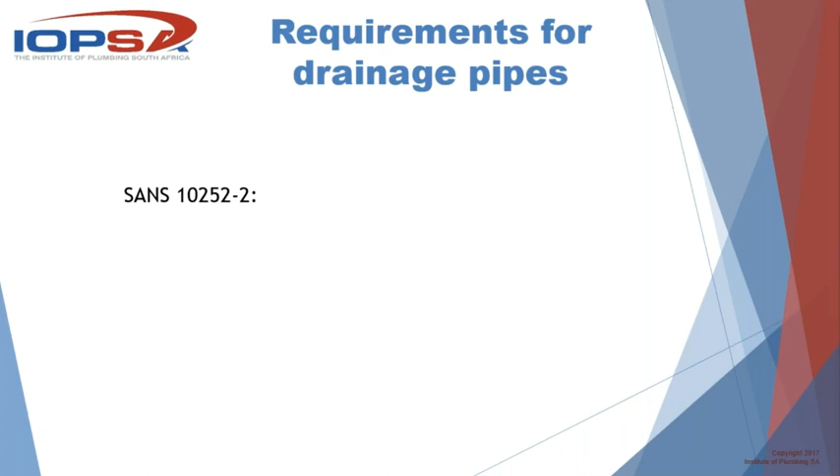because if you look at the standards, they are actually quite demanding. They want you to use plenty of brackets at very short intervals and so on. And what we tend to do is get in a rushed state, and we overlook what the requirements are. So it's vitally important that we understand what the standards say. And they say a few things about bracketing.

I'm going to start with drainage pipes, and then we're going to move on to water pipes, because drainage pipes and waste pipes are just as important when it comes to bracketing and support, for all the same reasons, and some of the reasons even better than water pipes. Okay, what does SANS 10252-2 say about brackets on drainage pipes?

It says that if you are using a type of pipe that requires protection from atmospheric corrosion, in other words, think about a metallic pipe such as, it wouldn't be that common copper, it wouldn't be that common galvanized, but certainly cast iron would be reasonably common. So if that requires protection against atmospheric corrosion, you need 30mm clearance all round.

That already speaks to you about the type of bracket that you're allowed to use when you run an external stack, for example, down the side of a building, and you have to protect this thing because you've got to get to the back of it to be able to paint it. Fixings are to be built in, nailed, or screwed.

What it doesn't say there is that it needs to be screwed, nailed, or built into the structure of the building, and it says that in the water pipe section, but also in the drain pipe section. In other words, you can't strap it or bolt it or nail it to another pipe. That doesn't constitute a proper bracket.

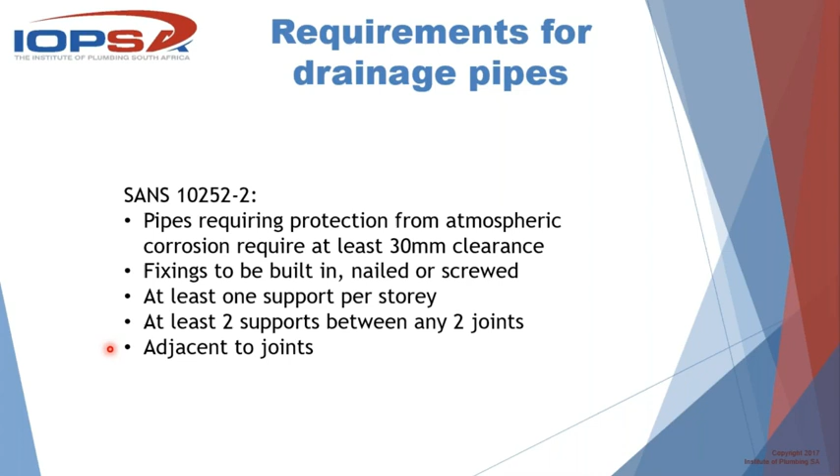you are not taking into account these 2 little guys here: at least 2 supports between 2 joints and adjacent to joints. So what is that telling us? It is telling us that we need to consciously design the placement of the brackets. We need to know what the layout is going to look like, and we need to place the brackets according to the layout.

Right, continuing with drainage. The supports must be strong enough for the pipe's contents and the pipe itself, as well as shock loads. What do we mean by shock loads? I mean at the foot of a vertical section of drain where it changes direction and becomes horizontal. At some point, you're going to be experiencing shock loads there where you've flushed a toilet or two, whether it's 1, 2, 5, 10 stories up, it makes no difference. When the water hits the foot of the vertical drain, there's a shock load attached to it.

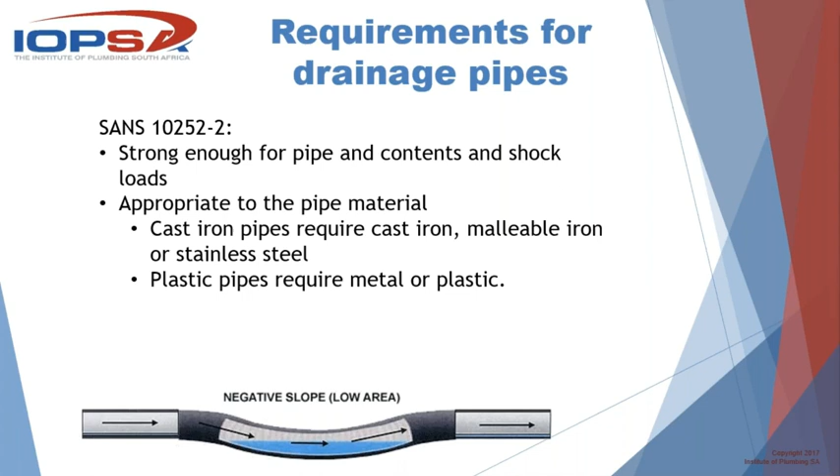Plastic pipes require metal or plastic, but it continues to say, if you're using plastic pipes vertically on multi-story buildings, then you require metal holderbats for fire resistance purposes. Now, how many of us knew that? So even though you're using PVC pipes to go vertically up a stack, whether it's in a duct or external, if it's a multi-story vertical stack installation, you shall use metal brackets. Okay.

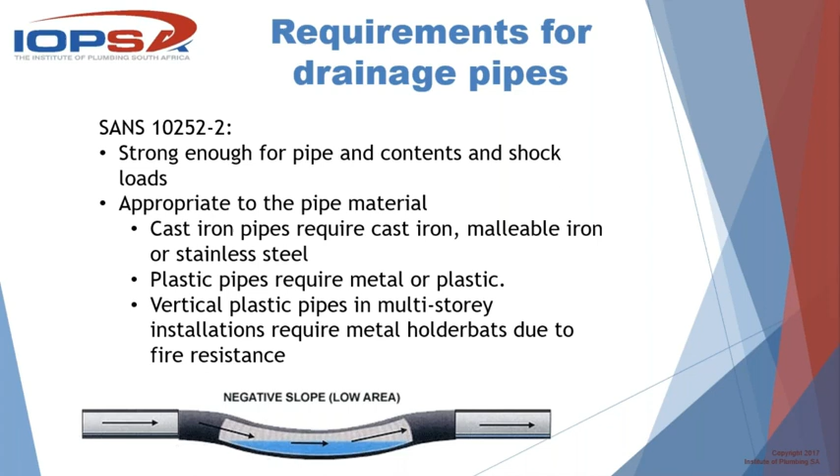So here are 2 tables. These are tables that are in SANS 10252-2, and they give us maximum distances between supports for various situations. I'm not going to go through everything, but what you can see here, if I just click, the PVC requirements. The top row there is less than 50. In other words, a 40 mil PVC pipe. If it's vertical, you need supports every 1.5 meters. And if it's horizontal, every 600 millimeters.

Anything equal to or above 50, which means pretty much all external stack work, including waste pipes, because they should all be 50 anyway. Vertical is 1.8 and horizontal is 1 meter. So that's quite an easy, nice round number to remember. 1 meter is pretty much the minimum requirement between bracket centers.

Then you go on to polyethylene pipes. Now these are the pipes that are typically melted together, right? We're all familiar with them. Not going to go into the debate as to the correctness of the system, but what does it say about polyethylene? It's very specific here at the bottom where I've highlighted. It says the pipe supports provided by the manufacturer for this particular system should always be used. You can't use the ones that you've got stashed in your cupboard or anything like that. It's got to be specific to the system.

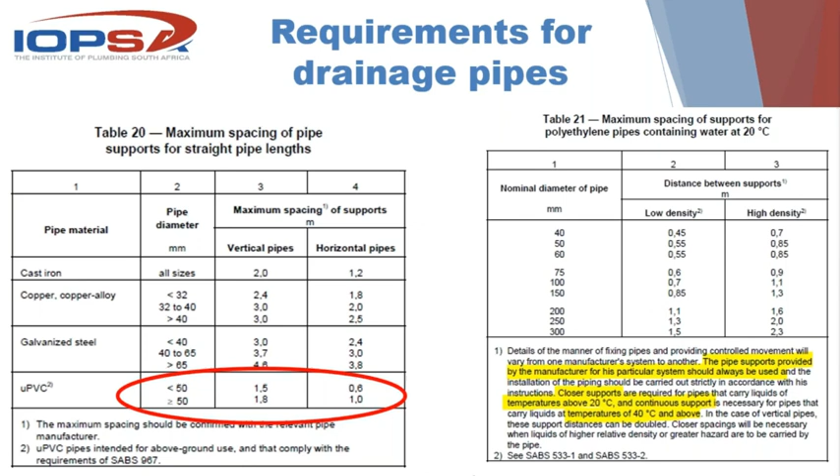It continues to say you need to change the maximum spacing of these supports according to the expected temperatures in the pipes. So you must bring those supports closer if you are expecting temperatures of above 20 degrees. And you need continuous support. Listen to that, continuous support. In other words, not intervals, continuous support for pipes that carry liquids above temperatures of 40. So just take note of that for those of you that use polyethylene piping systems. That's quite an often overlooked thing.

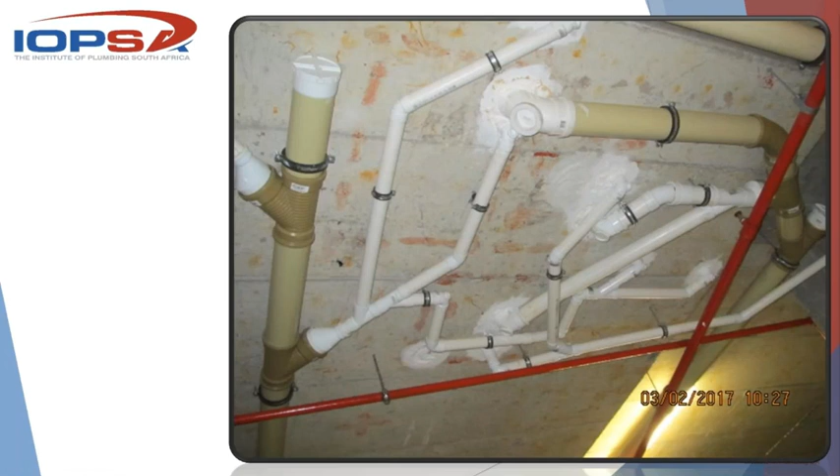Not so lekker. Okay, not so lekker. There are a couple of problems here. I'm not going to talk to the type of pipe or anything, but what happened to support between every two, or two supports between every two joints? What happened to supports adjacent to joints, which means next to? So here they should have had a bracket there and a bracket there. There should have been a bracket there and a bracket there, etc. So this is an option that's not so lekker, and you can see what's going to happen here.

This is a pivot point. This is here where my little pointer is at the moment. That's a pivot point. Yes, I know this is fixed on the left-hand side, but at some point, this whole section over here has got movement in it. It's able to move. So there's a nice seesaw. Here's a nice seesaw because, okay, there's a fix and there's a fix, but you've got flex here, here, here, here, and here. This is all flexible stuff. So you can move that around and eventually it could become misaligned, okay?

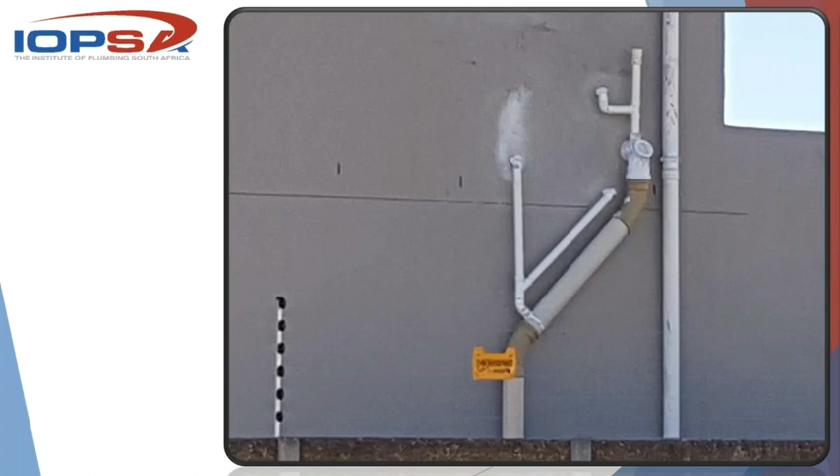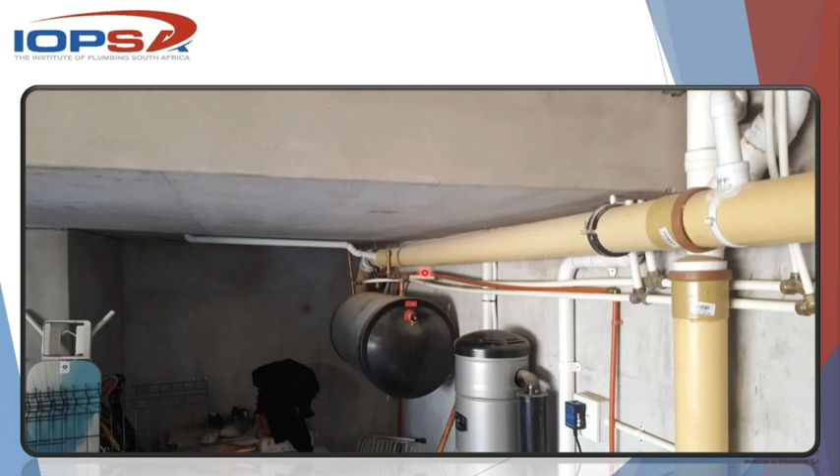Stuff like this, no brackets, nil. No support, not going to fulfill what we're trying to achieve. No brackets, again, where's that 1 meter? Type of pipe is incorrect, but we're not going to go there. There's a waste pipe over there, which has got no brackets whatsoever. So nothing to support it. Somebody's going to come along there, hang a coat hanger on there, and it's going to deflect that pipe.

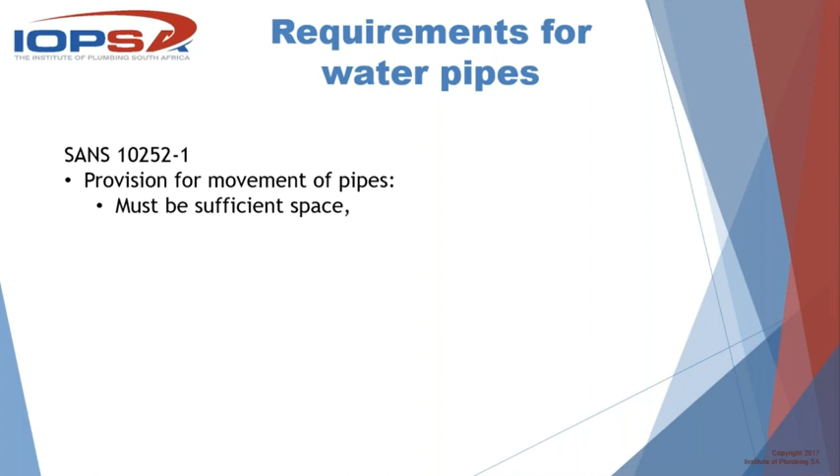All right, water pipes. So what does SANS 10252/1 this time say about water pipes? If you need to provide movement for pipes, for expansion and contraction, the following must be adhered to. I'm just going to click through it. There must be sufficient space for that movement of the pipe. There must be sufficient length of tubing around the bend and branch. There must be an offset or a loop to accommodate the movement. And hot water pipes longer than 18 meters must automatically be installed to allow for expansion.

I'm not going to spend too much time there. This is not something that we spend too much time designing. This is for quite large installations where you need to actively make provision for movement in pipes, although we must expect pipes to move to a certain extent. But you can see there, for example, a hot water pipe starts needing that sort of provision at 18 meters in length, and they're talking about straight length. So that's usually bigger work, okay?

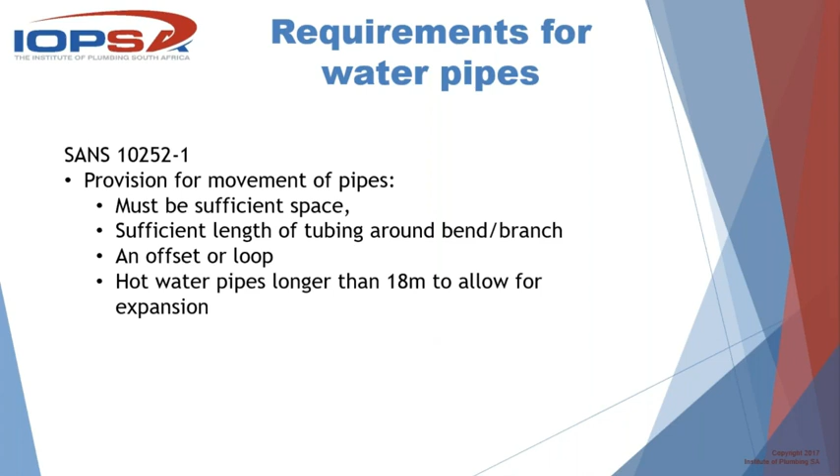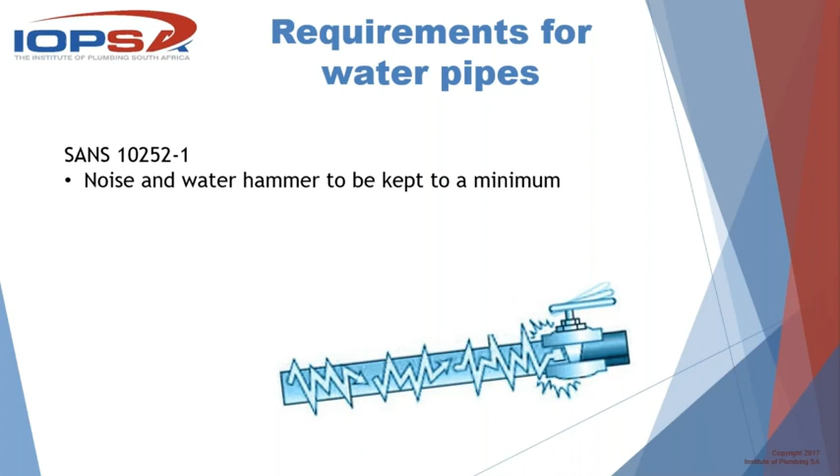10252/1 continues to say noise and water hammer to be kept to a minimum. This is them telling you what you're trying to achieve. Noise and water hammer must be kept to a minimum. The holder bats or brackets or fasteners must be attached to the building structure. Again, not to another pipe, not to a piece of conduit, to the building structure. Appropriate material and type for the pipe. They must be able to withstand the expected loads. They must be corrosion resistant.

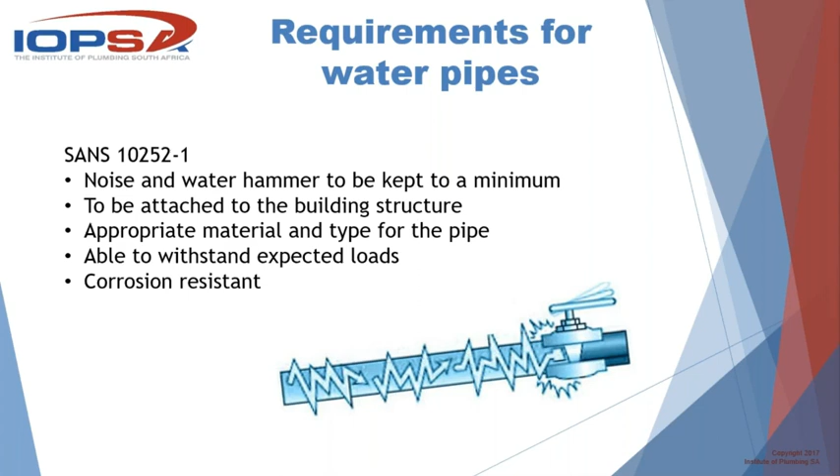Type for the pipe. Think about dissimilar metals. Think about TP discharge pipes that can experience 80, 90 degrees C, and you've got a little plastic clip that'll melt or deform at 40 degrees C. Is that appropriate for the type of pipe? No. Able to withstand the expected loads. Very often we find pipe clips installed in such a way where the slightest breath of air is going to dislodge the pipe from the clip. Again, some examples of probably what you would want to see.

And you'll see the size range here, the top line is 15 to less than or equal to 25. So that's 15 mil. That's half inch, 3/4 inch, and 1 inch piping are subject to these distances here. This is copper. Non-vertical, in other words, horizontal or flat, 1.6 meters. That's nice and wide. You don't have to worry too much about 100 holder bats. Vertically, 3 meters.

Hello, that's a nice big span. You can probably make that less, but still, it doesn't place that amount of pressure on you when you're installing these things. But hang on a second. Let's go look at polyethylene, or just read plastics. Less than 20, in other words, half-inch piping: non-vertically, 300 millimeters; vertically, 600 millimeters.

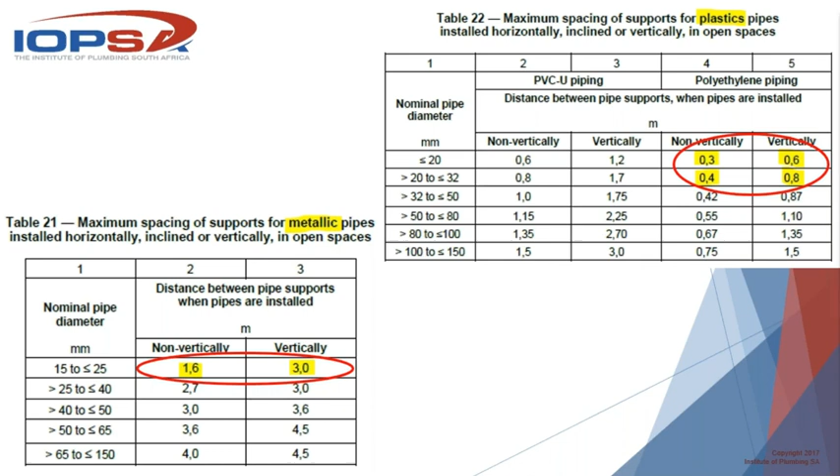All right, now think of running those pipes across a range of trusses. You're not going to be able to put a bracket on every truss because it's not close enough together. So you have to add additional timber or route the pipes differently. So it's added costs and so on.

And if you haven't done that, ladies and gentlemen, please understand that it is non-compliant. If it is audited, it will fail. And you will have to go back and rectify it. And it's what the standards require.

So in a nutshell, and to wrap up, what are we trying to prevent with bracketing? What is the purpose of bracketing, of pipe fixing? What are we trying to prevent? Now, to put it in a nutshell, sedimentation or sediment buildup. Think about a pipe, even a water pipe, hot or cold, more so hot, that has got a big bow in it. Think about it having a big loop in it.

Do you think sediment is not going to build up in that pipe? Well, I've got news for you, it will. Eventually, it's going to start building up in that pipe, and it's going to start blocking off and changing the characteristics of the flow. Yes, of course, we talk about sediment in waste pipes. That's obvious. But even in water pipes, for example, think of an open to atmosphere overflow pipe, such as a PRV that's constantly wet, constantly attracting little particles of dust if it's got a belly close to its outlet.

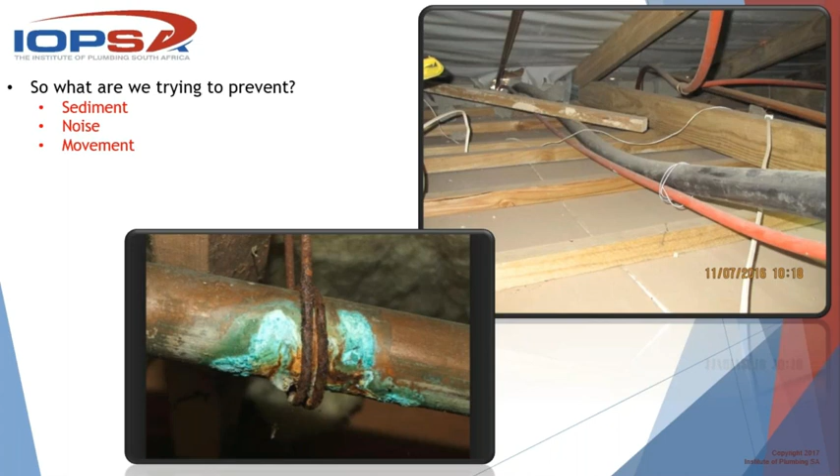We're also trying to prevent noise, both in wastewater as well as clean, potable water. We're trying to prevent movement, for obvious reasons. When you've got movement in pipes, you've got stress on joints, noise is a result of that. The pipes themselves become stressed. It's almost too obvious to mention, but there it is, movement.

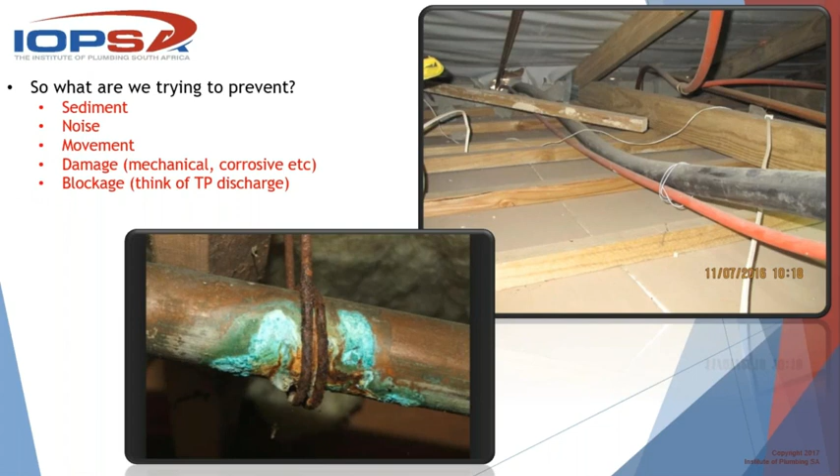And of course, we're trying to prevent damage of all descriptions, both mechanical damage and corrosive damage, and there's an example of corrosive damage with incorrect fixings. That is a direct result of electrolysis, and so that's the kind of damage that must be included in that. Blockage, as I've said, ties up with sediment buildup. Sediment buildup can have negative impacts on flows, but it can eventually lead to blockage of the pipe, whether it's a sewer or waste or an important pipe like a TP.

So, a couple of examples of good and not so good. Here's one where the pipe has been supported every 200 or 300 mil, but it's been supported with cable ties to another pipe. Now, there's all kinds of things wrong with that, and it hasn't been routed properly. Changes of direction haven't been kept to a minimum, etc. You get one glance at it and you can just shake your head and laugh at it. This is what we're trying to prevent.

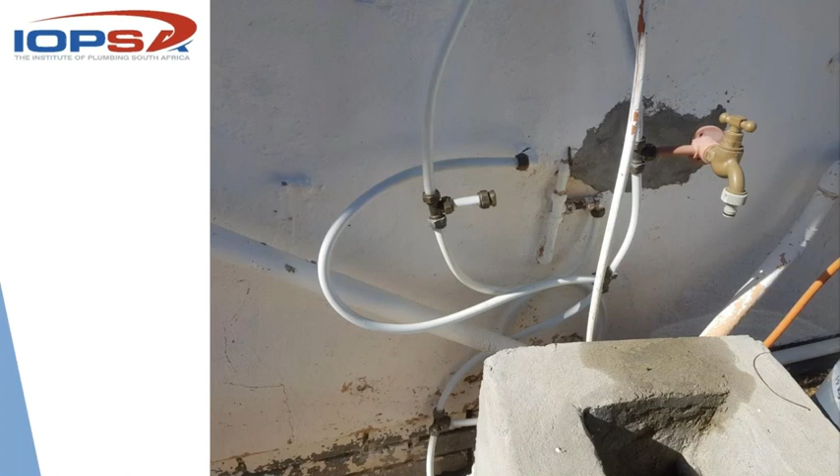This is exactly the purpose of holderbats. It's the purpose behind applying your mind to say, okay, where are my pipe runs going to be? They're going to be there. I'd like to see that there. I'd like to come off perpendicular here, there. I can go up. I'd need an offset there. Picture it, figure it out, design it, and then carry it out.

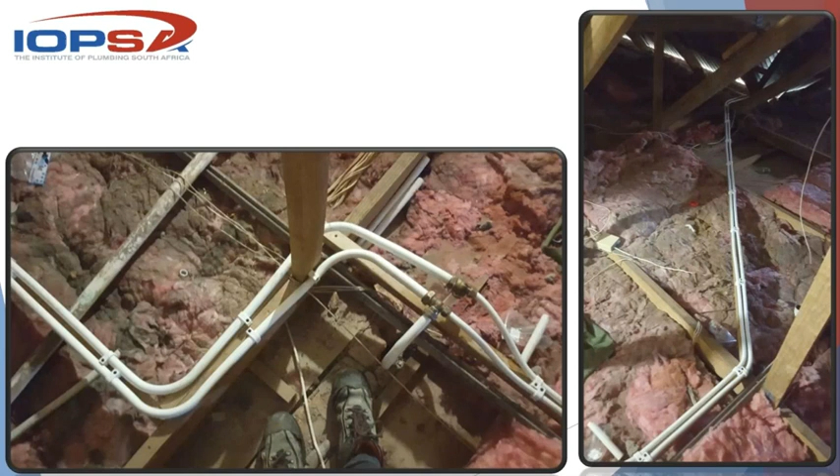These are a couple of examples of very, very nice installations. The guy has thought about it. He knows that he needs to put brackets at X intervals, and therefore he's installed additional pipework support to be able to accommodate that. Each pipe is supported independently, so it's doable, and that's it.